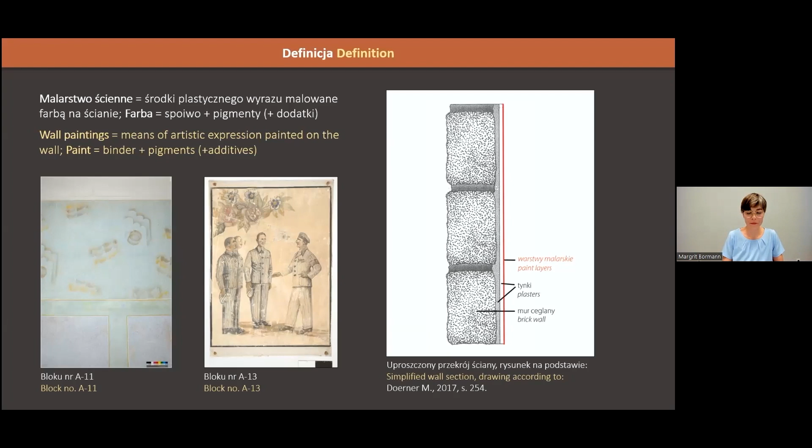Before I move on to the conservation aspect, I would like to show you which objects we are dealing with. The first category are artistic wall paintings. The paintings show such subjects as human figures, animals, landscapes, still lifes, and many more. The majority of authors remain unknown, and in Auschwitz I, 30 such paintings have been preserved.

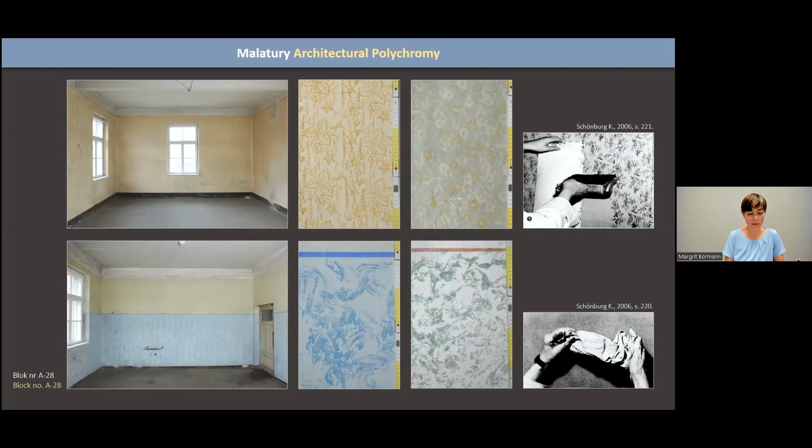The next category comprises colored wall treatments, so decorative wall finishes. Interiors of prisoner blocks look like civilian buildings of that time. It was a very popular interior finishing technique in Germany at that time, made by painting spots. In the former Auschwitz I camp, there were thousands of square meters of wall treatments which have been preserved.

The next category are disciplinary watchwords and slogans which were painted by function prisoners. In reality, this was supposed to show other prisoners that everybody must be disciplined. 50 such watchwords and slogans have been preserved.

On the walls, there are also drawings, engravings, and other inscriptions. The majority of them were made in secret, and they are the last signs, the last traces of the victims of the camp. The majority of them are in the cells of block number 11, the death block, and there are several thousand such drawings.

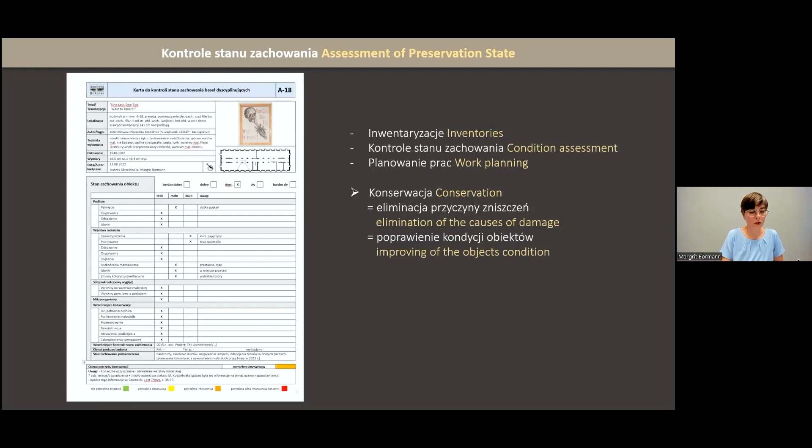We say whether we have to observe it, do nothing, or perhaps run quickly and save it. This one was categorized as intervention necessary—it needed some cleaning of the surface and stabilizing of the painted layer. We do our conservation based on that.

As has been mentioned, we document all our works, not only photography, but also in writing. We use electromagnetic radiation from ultraviolet to infrared.

Various electromagnetic radiations are also used to see some hardly legible inscriptions.

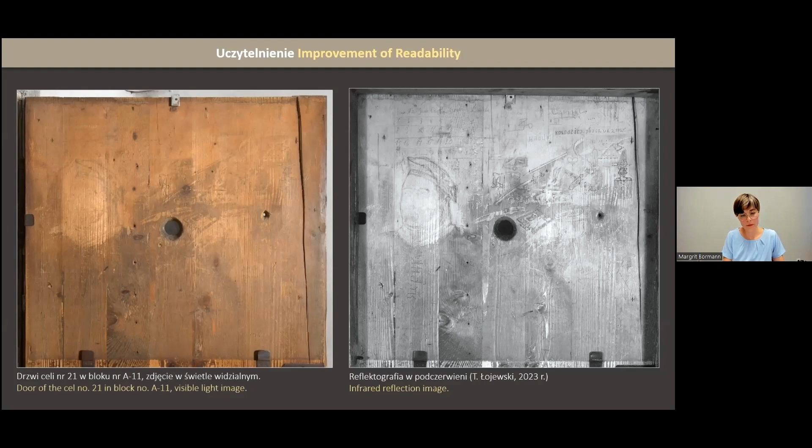A very important element in our work is the research of the material, of the composition, and the changes that take place. Only when we learn what we have before us can we understand why the site is being degraded, what the reasons for damage are, to be able to select an appropriate method, and therefore we focus on the materials because they are what carries the historical information, and it's the material that ages. When the material is gone, the object, the individual element is gone.

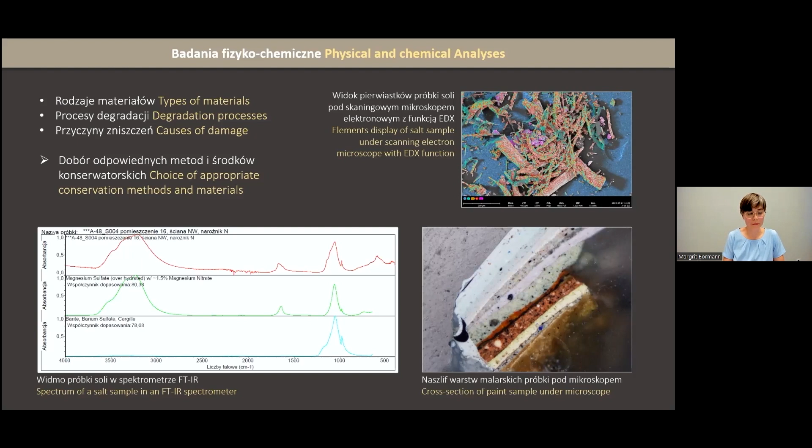We try not to sample, to do non-invasive testing, but sometimes sampling cannot be avoided.

There are also other dangers such as dust, insects, salt, cobwebs, and so forth. Naturally, we also remove those from the surface of the objects.

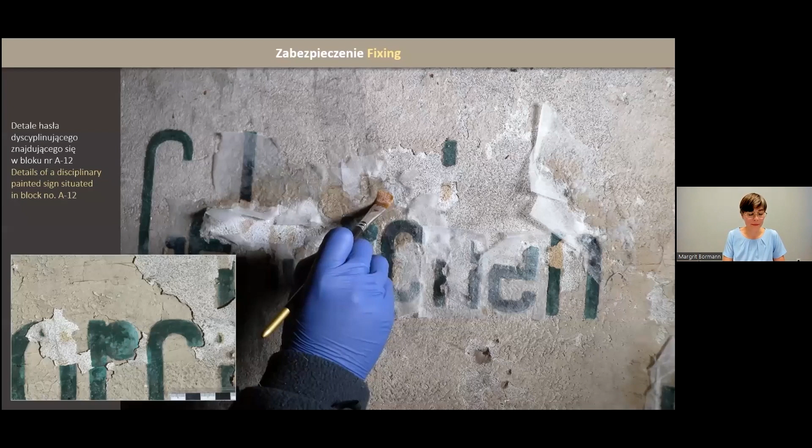The most frequent destructive factor is the loss of mechanical properties of those painted layers. They move away from the wall or they start flaking, which means that they may fall due to forces of gravity. We protect them on the wall with proper means and we put glue below them.

Well, that results from our guidelines, as we've mentioned. We predominantly run protective conservation, which means we focus on protecting the original material, the authentic material, and we do not reconstruct. We do not add things that are gone, to preserve this character of a witness of history. We conserve the site as received. We only do the most necessary steps, and we call it minimum intervention, only as much as to make sure that it is as untransformed for future generations as possible.

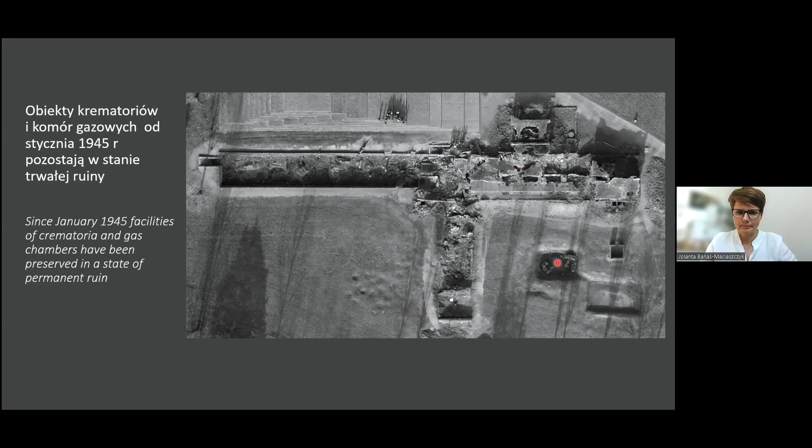You can see the undressing room, the gas chamber proper, and the stoves. The current condition of retention results from the works that were conducted on the ruins beginning with the 1960s. Without many years of that effort to retain the ruins, these would have certainly not survived to this day in the form, in the condition you can see them.

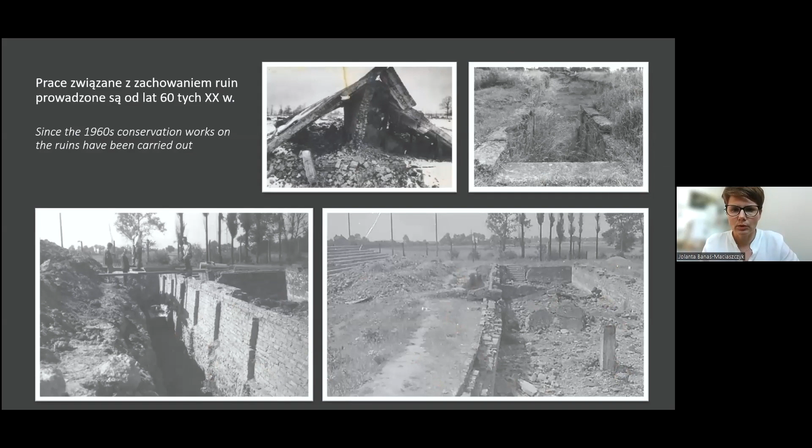For a long time, since the very start of work on preservation of ruins, work on retaining the efficiency of original water discharge continues in order to dewater the ruins. It's of key importance for the survival of these elements, as a majority of those is situated below the level of the ground.

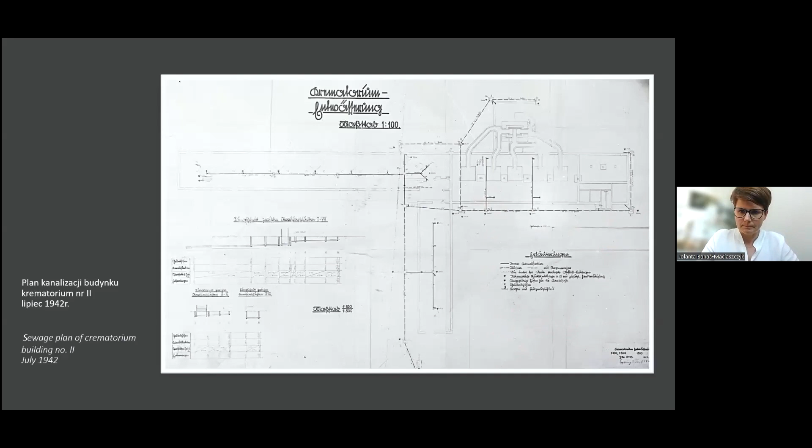This slide shows the historical plan from July '42, which presents the water removal from gas chamber number 2. This dewatering line comes here as black lines, and most of it operates to this day, thanks to us conserving it very efficiently. That greatly helps the survival of those sites.

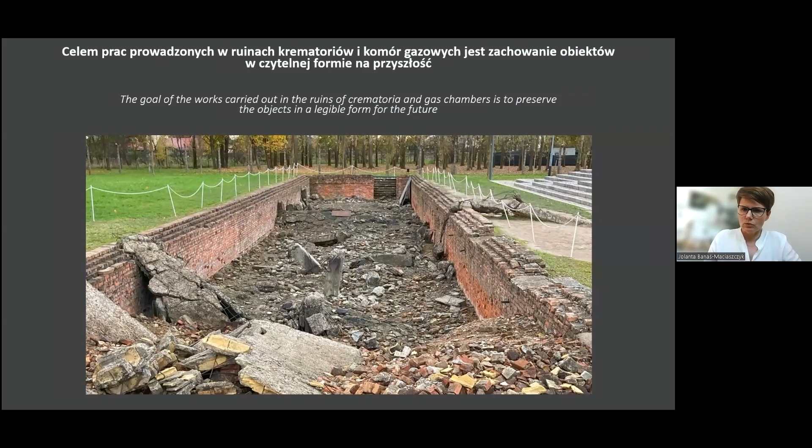The reason for conducting works here is to keep those for the future and keep them legible. It's not about retaining every particle of matter you can find, because we know this is objectively impossible. However, we try to make sure that what we found survives and lasts as long as possible in the best condition. The task is extremely difficult, first of all, due to the form of the site. Ruins of the crematoria and gas chambers are sites where large areas are filled with rubble, and very often they are either inaccessible or hardly accessible.

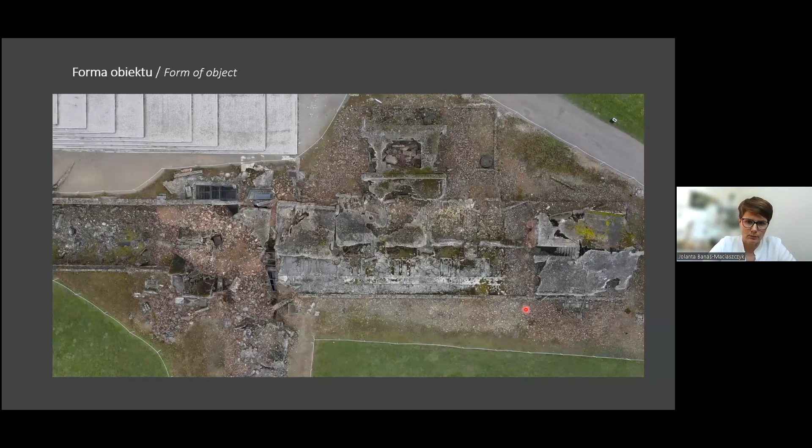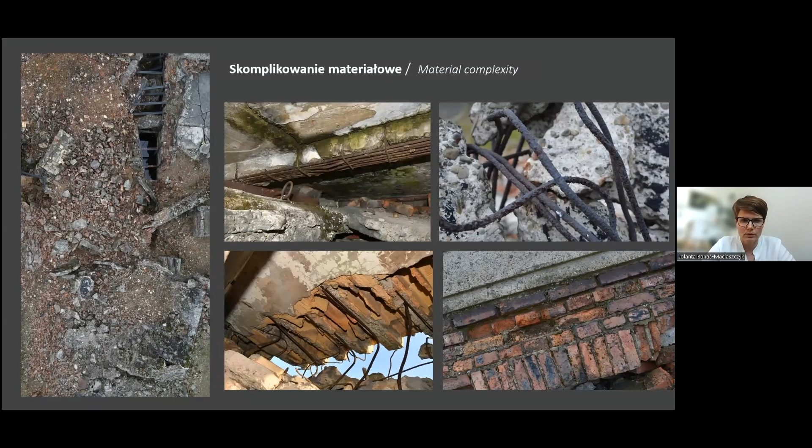The following aspect is the complexity of materials. We have a range of different construction materials here: reinforced concrete, bricks, metal reinforcement rods, and also Ackermann bricks. They are connected, often intermingled, which makes planning and conducting works harder. Moreover, these are materials very infrequently found in contemporary conservation, like the Ackermann bricks I've mentioned. They are a very characteristic element of our structures.

Another issue that influences these sites is the lack of option to limit the actual impact. Those sites are exposed to changing atmospheric factors, external pressures, and also the pressure of underground waters. There are no ceilings over them, which used to stabilize the walls of the undressing room and the gas chamber. Also, the groundwaters and the groundwater table make a powerful impact here.

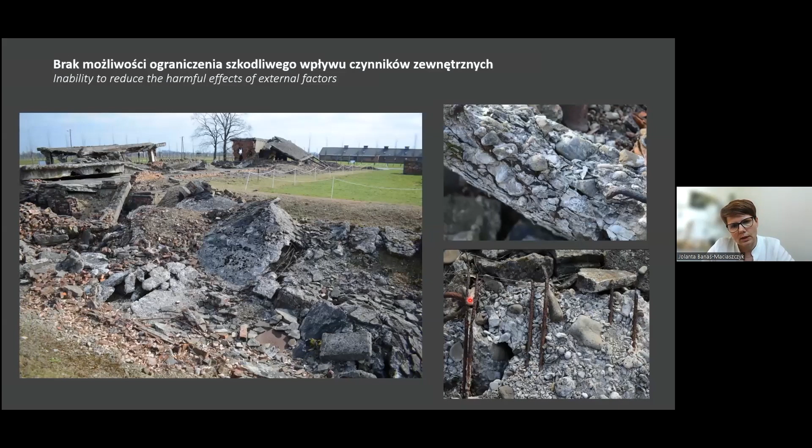What we can see in this photo is the inside of gas chamber number 2. Relics of the ceiling slabs have been preserved. On the right-hand side, this is a reinforced concrete slab where you can see that the elements are strongly and badly eroded. And this is a section of reinforced ferroconcrete where you can see the reinforcing rod, and the mineral filler has been nearly absolutely cracked out.

The work on the ruins is conducted in two ways. The first is current work, which helps maintain the site in good condition. We run regular flushing of the drainage so we can efficiently remove water, cleaning, removal of weeds, also supporting some construction elements until the works have been concluded.

Another type of work is project works, whose scope covers complex work on a specific issue that you find on site or a specific area of these ruins.

Conservation works here, and works on gas chambers 2 and 3, have been carried out since 2003. From 2004 to 2015, the work on the ruins was conducted by the museum thanks to the support from the Ronald Lauder Foundation.

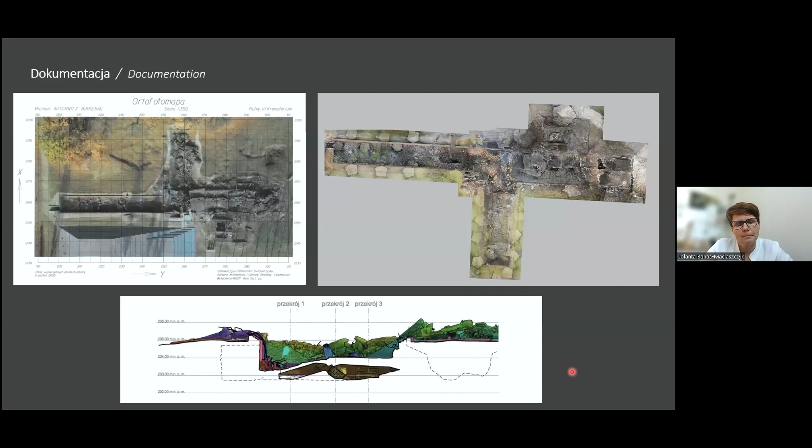The remaining photographs result from object scans. We have the point cloud, which lets us use, for documentation purposes, various cross sections through the site. These can look as we illustrate in the bottom picture for you.

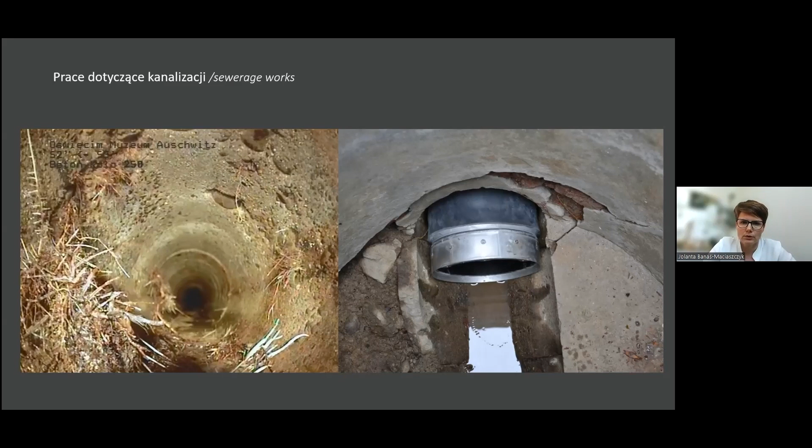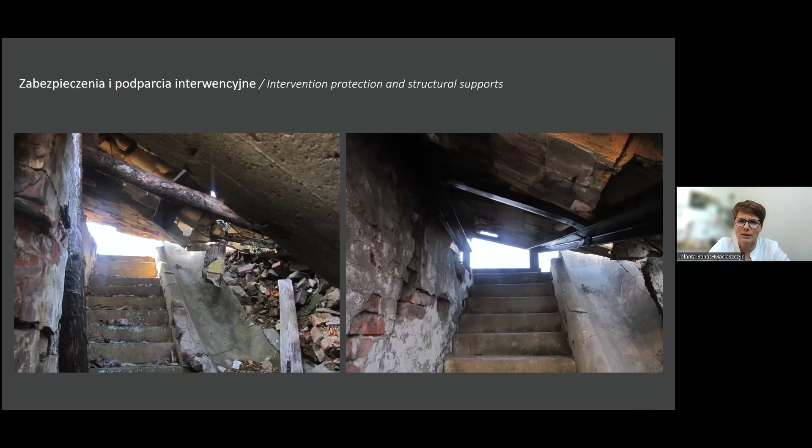An important scope of works here were the protections and temporary supports, carried out in two stages. Initially, the supports were made with wooden elements, a very simple method originally used in mines. But the final, eventual ones were done with steel supports, and then we do not return to these fragments, which are protected for a longer time, so we can really rely on such support and protection.

An important scope of works was also the protection of the gas chambers, especially against the pressure of the ground. The gas chambers of both objects were treated this way: a special system of pillars was introduced outside the walls, and they penetrated deep into the ground, whereas at the top they were connected with a concrete element called a support, which stabilizes the structure. So we can see the scope of drilling here.

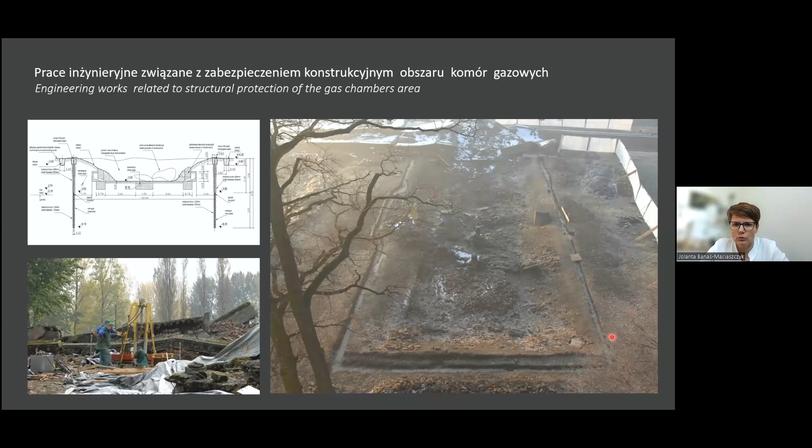We also see the final situation with the cover, and this construction was initially performed underground. After this was all done, this cap construction protected the walls of the gas chamber against the pressure of the ground. And the last stage, obviously, was the

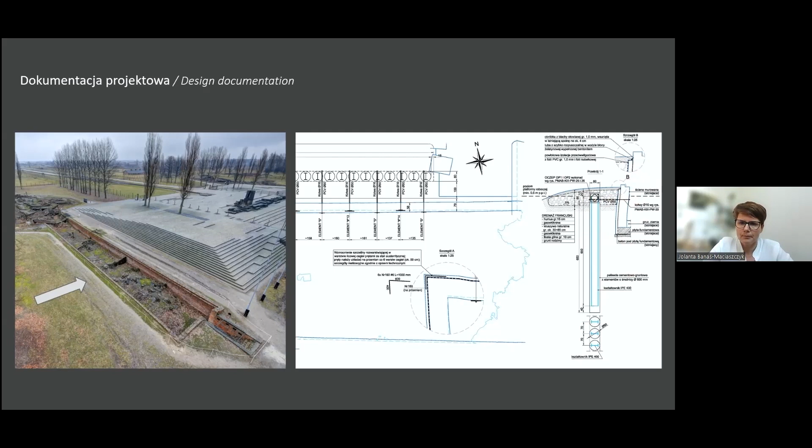documentation concerning the walls of the undressing room. This wall was really very slanting, and then the underground construction was built, and some concrete pillars were introduced. Once introduced within a distance from the historic wall, this was supposed to protect against moving and deformities, and also it allowed for adding additional anchors so that the wall doesn't move.

We can see that since 2016 the works connected with the protection and conservation are done by the Auschwitz-Birkenau Foundation. We can see the works in progress. These are the works that I previously discussed, and you can see the columns which stabilize the ground, and the task is to support the wall.

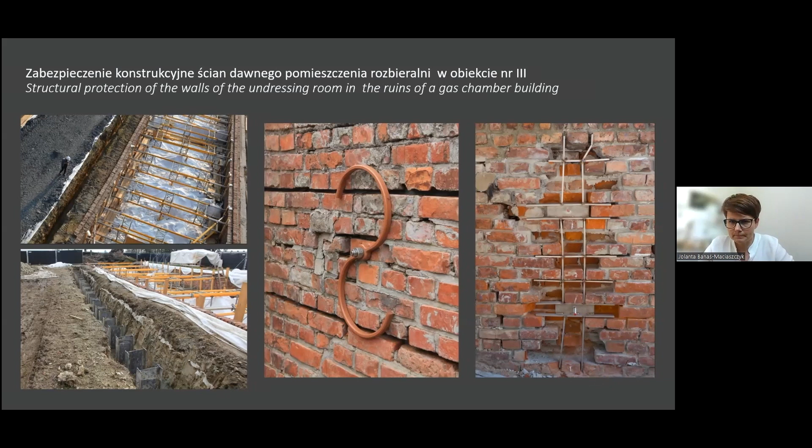Similar scopes of works were also performed in the southern wall, that is the wall opposite. So this is the fragment of the wall before the works and after the works were completed. These are the walls before the conservation, when some defects are seen with a lot of cracks.

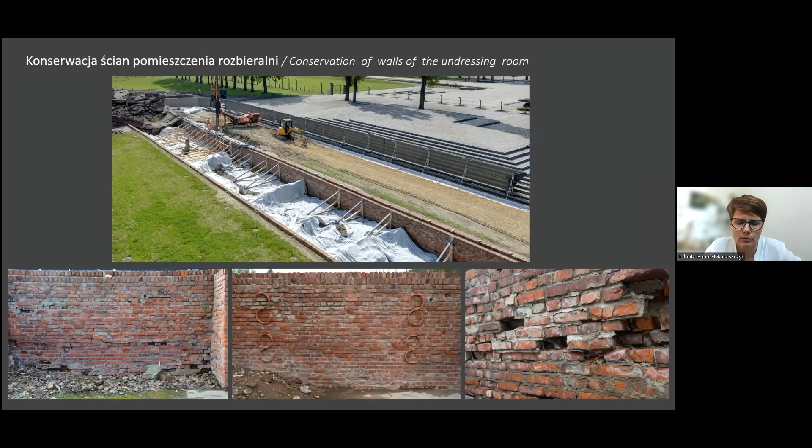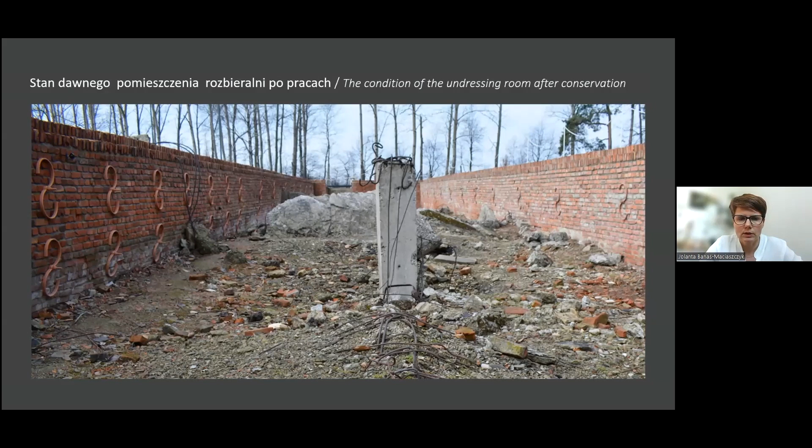We can see some displacement of the wall, and because of the construction elements, it was necessary to introduce the stabilizing elements. On the second wall, that is the southern wall, this was introduced in two lines, in two rows, and the southern line was much more damaged than the northern one. This is the condition after the preliminary stage connected with the protection.

The works also covered the conservation of the reinforcement elements, and you can see that this was in the undressing room and in the gas chamber. Here you could see all the reinforced concrete elements were conserved, and you can see the effects of such works where the reinforcement was protected, and here you can see the condition of corroded reinforcement before the works were started.

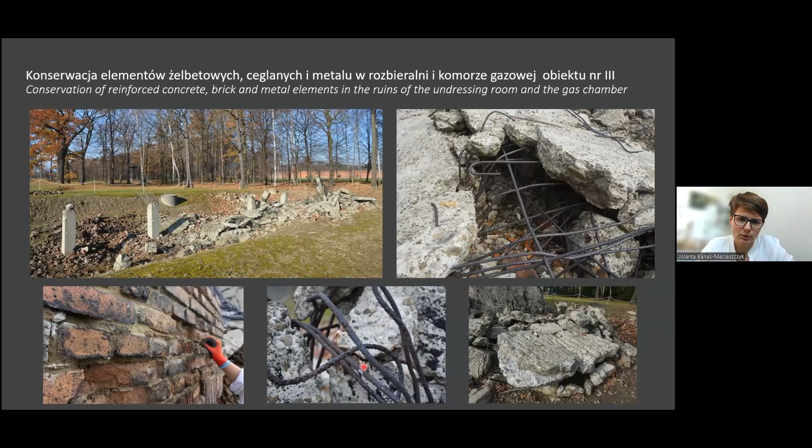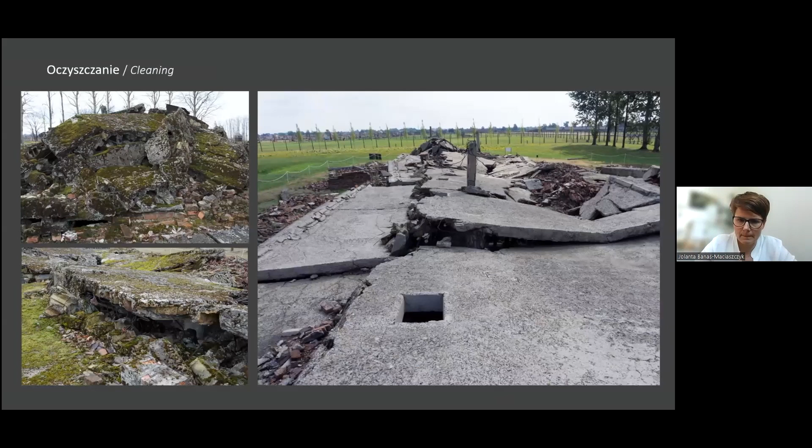To close, I would like to present to you the works which were completed this year. These works covered the construction protection and conservation work.

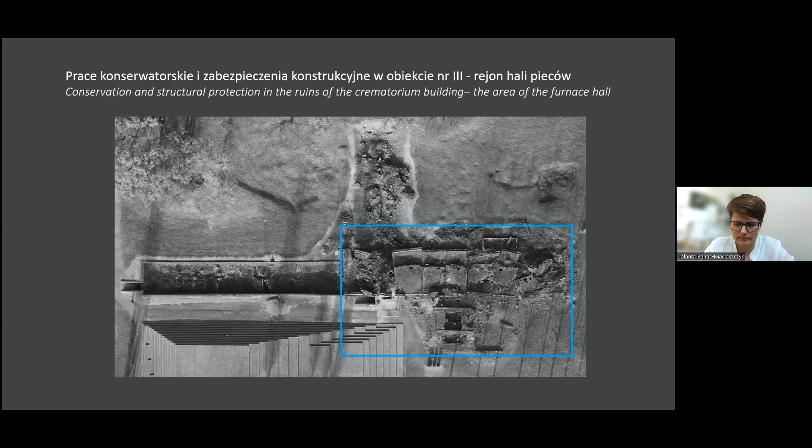These works concerned the protective palisade, and this is the assembly of the anchors, and these elements were introduced into the bonds. After the works are completed, no bonds will be seen anymore. These are the protections in the form of bands that stabilize detached elements of the concrete.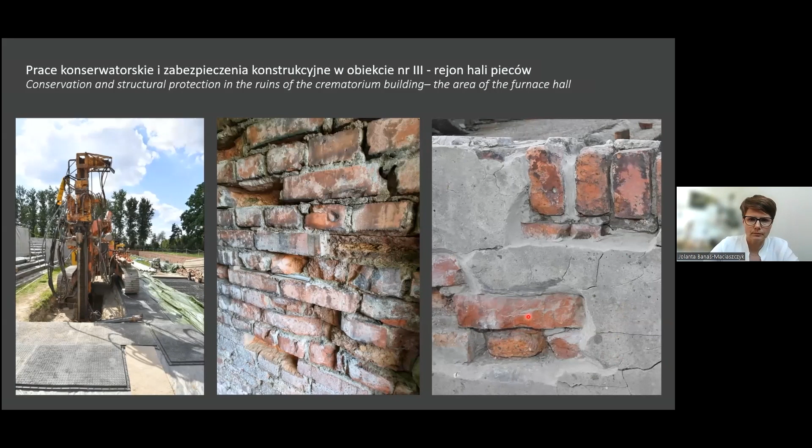An important scope of conservation works performed last year were the works on the ceiling plates, the plates with bricks made from reinforced concrete. These were difficult because of the difficult accessibility of these fragments, because the places that you see in the photographs are inside the ruins, and these are the bottom parts of the ceiling plates.

This is one of the elements which is completely uncovered reinforcement of the former bar, and this is also the situation after the conservation with carefully protected elements of the reinforcement. Here you can see also the works in which you use specialist agents for the protection of reinforced concrete.

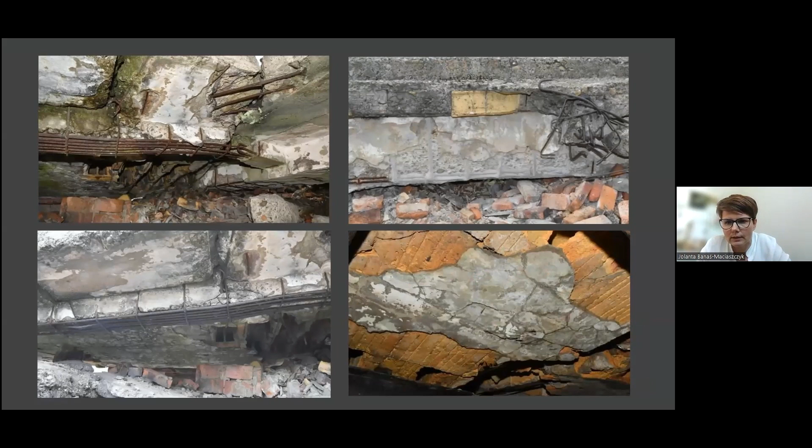This is the preserved fragment of the concrete on the ceiling made from Ackermann bricks, which was protected and implemented. Some bands were introduced on the edges of the concrete to protect them against falling out. Also, some injections were made, thanks to which the empty spaces between the bricks and the concrete were filled.

On the left-hand side, there is a fragment of the wall inside the underground room. This is the situation before and after the conservation. These were the defects in the brick wall, which were filled.

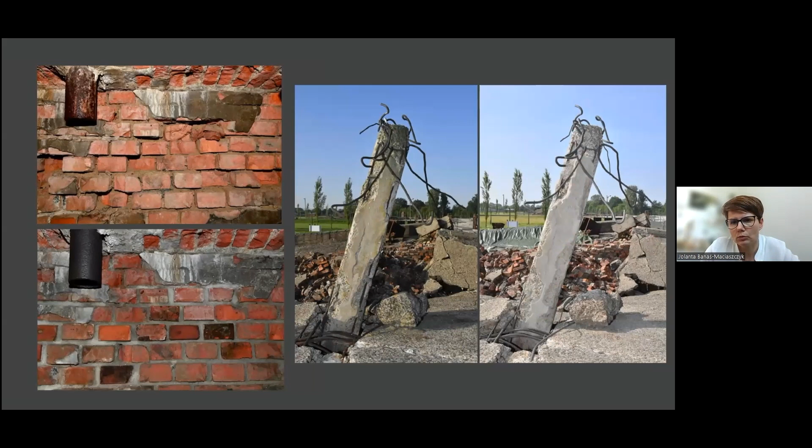This is one of the pillars within the furnace hall, which has some elements of reinforcement that are strongly corroded. These are the defects, and also the concrete covers, and you can see the condition of the conservation work. Where the reinforcement was uncovered, it was protected with some repair or with special anti-corrosion paint, especially in places where it was completely devoid of any cover at all.

For the first time, we also made the support of the ceiling slabs and the ribs, because these are very irregular elements, and we were unable to use the methods that we are familiar with.

That is why we introduced a special construction with a very significant scope of regulation, thanks to which we were able to adapt specific elements to the shape of the ceiling slab. Here you can see the method of protection by means of supporting the ribs of the Ackermann ceiling with special rails, with an insulated layer of concrete, and that is why they are supported in construction.

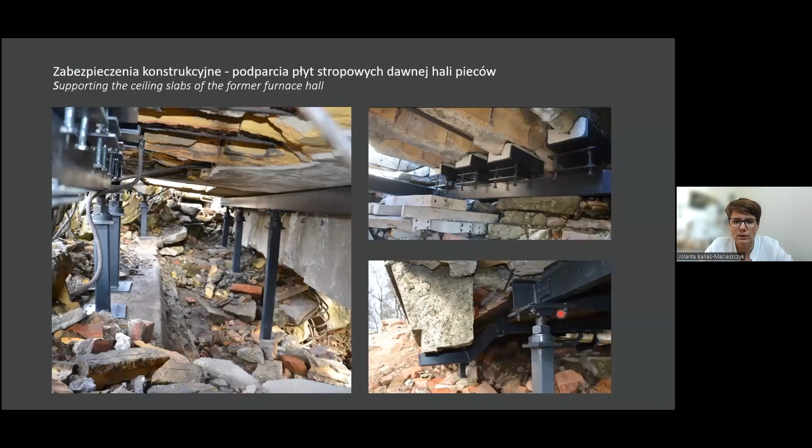This is a very interesting scope that was last to be carried out. In this slide, you can see that some of the works were conducted in the ruins of the underground room. In the past, there were some supports introduced, and they have been replaced by an entirely new construction, far better adjusted to the form, which is often irregular.

Obviously, the entire interior, the walls, the plasters underwent conservation and were protected as well.

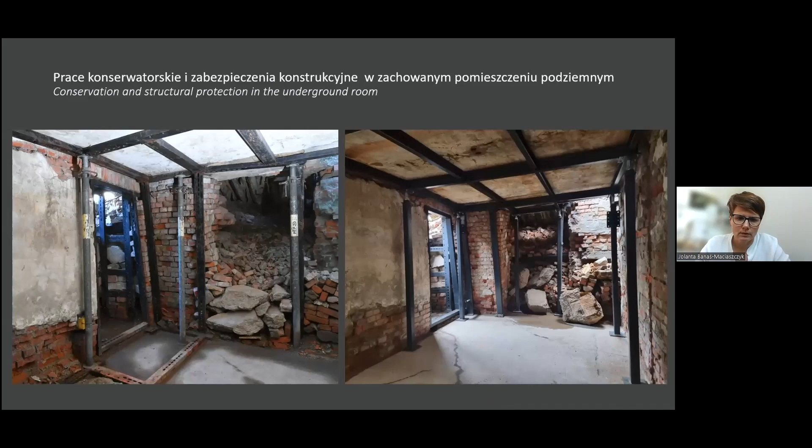An aspect that is exceedingly important for such works is documenting the condition of the preserved element and the post-work documentation. It's always made with due diligence, other than the standard documentation, descriptive and photographic. You usually also have photogrammetric documentation, used for detailed documentation in drawings, both the condition and the scope of works conducted.

You can see on the left photogrammetric documentation of one of the slabs, and this is the area from the bottom of it, showing the support construction. On the right, there is the documentation in drawings of how and what we conserved, and what works were introduced.

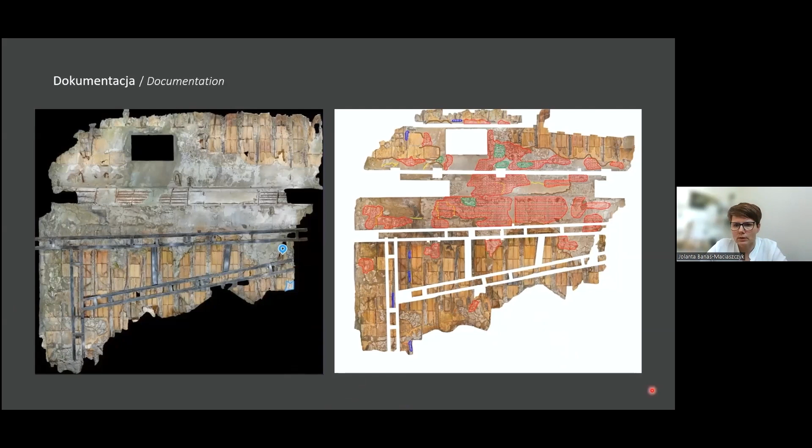Let me finish with a brief summary. Conservation of the ruins of gas chambers is certainly one of the worst challenges that we have here while conserving those. In planning and in carrying out the works, we try to make sure that all the actions are both ethically grounded and also have grounding in the state of knowledge, due to all the atrocities that happened here.

The purpose of those works is to retain everything here in a condition as close to the authentic as possible: the form of the ruins, the division into three main parts, the undressing room, the gas chamber, and the furnaces hall. Thank you very much for your attention.

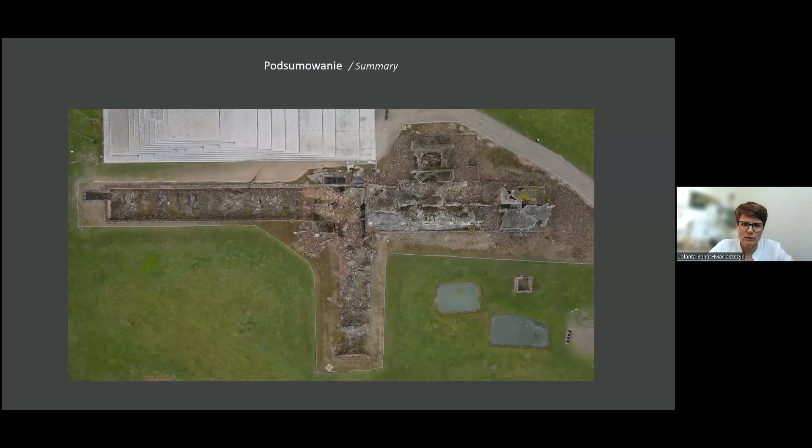I'd like to thank the speakers very much for those interesting addresses. I believe it's worthwhile now to emphasize that such a complex and multifaceted approach to all those sites as was presented here can only be possible when many experts in various fields cooperate, and that's what's happening in this division.